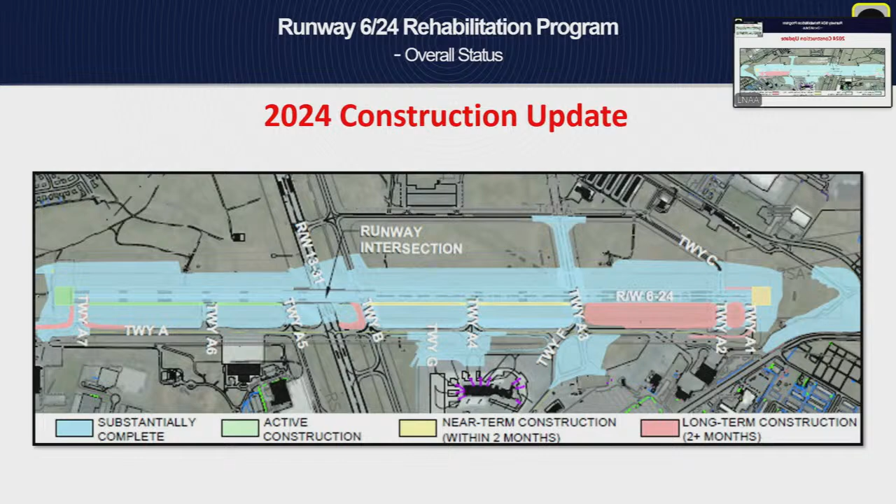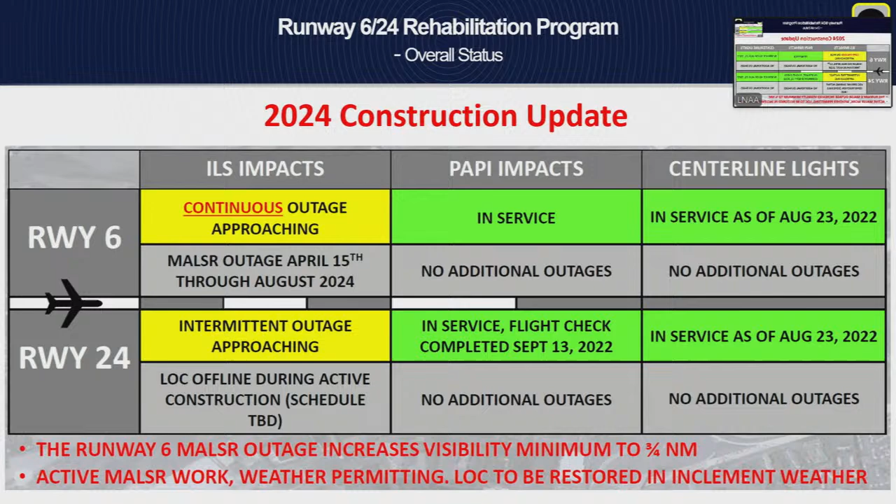As we like to show is just some of the outages coordinating with FAA. FAA is still working on the MALSR project, which is the instrument lighting system replacement. So we haven't heard any issues with the carriers, but we've been coordinating with them in terms of impacts. And FAA has actually been working really well within our construction time frame at night, getting the work done when the runway is closed.

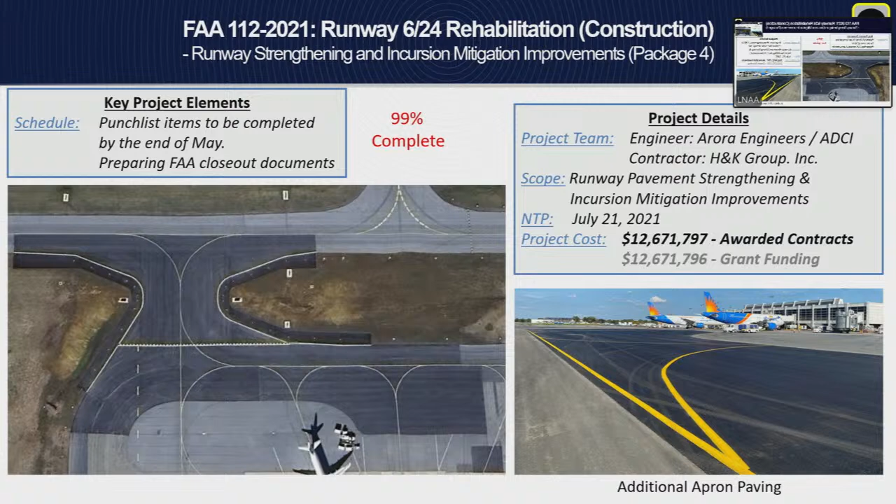Package 4, this one, as we talked about, is really just working through the punch list. Probably in the next couple weeks, we'll get the final numbers and quantities and then working on the FAA closeout. And again, the reason we show that is the final 10% of the grant we can't request until we actually submit the full closeout, when you know the final project number. So we kind of hold that because it'll probably be about $700,000 to $900,000 that we have to request at the end. So again, that's a good chunk of money we want to keep an eye on.

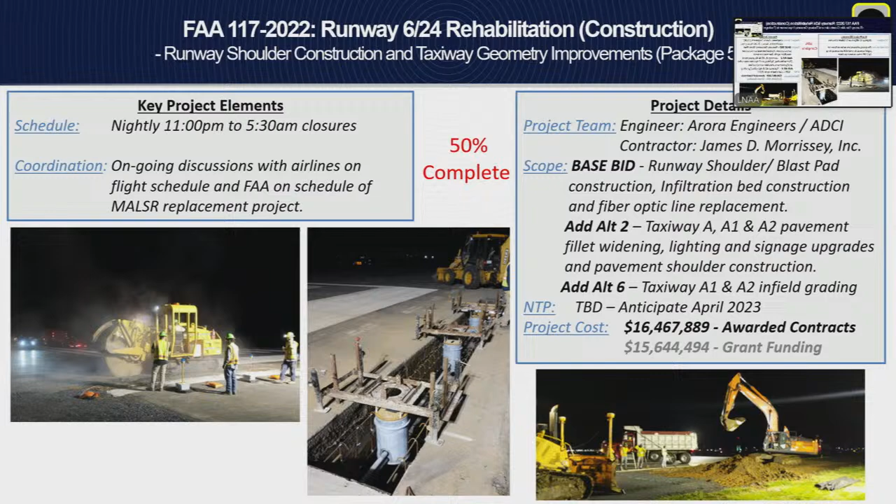Package 5 is really the work that we just talked about in terms of the shoulder construction. Again, nightly closures, 11 p.m. to 5:30 a.m., coordinating with the carriers. As you can see, again, putting in the approach end lighting or the threshold lighting. So all the work they got to do. And again, every night, basically building in the base of the shoulder, moving on, and then they'll come back and pave that.

So I added this project that we've been kind of working on behind the scenes, but just wanted to get the committee up to speed. Included in our CIP, the taxiway alpha rehabilitation. So taxiway alpha is the parallel taxiway to runway 6-24. So currently looking at the design documents, you can kind of see the green is really just a typical pavement rehabilitation, mill down, build back up.

The blue in the photo is actually areas that we need to completely reconstruct just because of the base that was in there before, the condition of the areas, and similar to what we did with the runway 6-24 project, because of the heavier cargo aircraft, we actually have to beef up the pavement section as well.

So currently working through the design, coordinating with operations on some of the impacts of how we're going to do the project, similar to the runway 6-24 project. Also coordinating with the FAA on funding. As of right now, kind of that blue rectangle is what we're looking at as the phase 1 construction based on FAA funding availability.

So as we work through that in the next couple of months to hopefully put a bid out in late June, maybe July timeframe for a grant this fall, that's kind of the section we're looking at. So more to come. I just wanted to make the committee aware as we're working through that FAA project.

You can kind of see here in some areas of Alpha, that's a pen sticking out in the back. So it's not something you really want on a taxiway when you got cargo aircraft going down the pavement. And the reason we're actually doing this first is this section right here in front of Hangar 10 is probably one of the worst sections of the taxiway. So trying to hit that first.

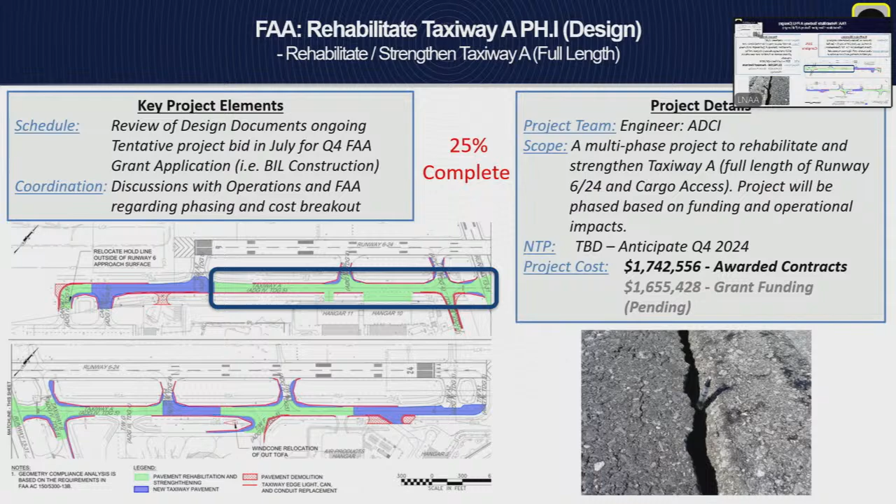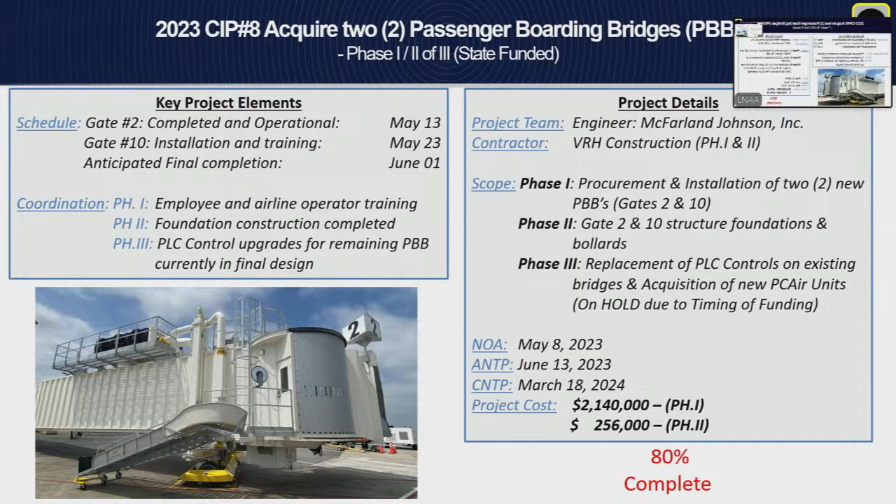So no, good question. Boarding bridge project, been pretty busy this past month, so Gate 2, which was, as a reminder, former Gate 3, I think we showed was installed last month, but it went fully operational May 13th of this month. Gate 10, currently removed the old one, put the new one in, currently working on commissioning it, and probably the end of next week, that'll be up and running as well.

So again, just some photos. Top left is Gate 2, former Gate 3. You can see you got the updated markings of aircraft that are on there. And then bottom left is the old, pretty old looking too, Bridge 10, and then the new one that they were putting in. And they did that swap basically in a day and then just continue to work through it.

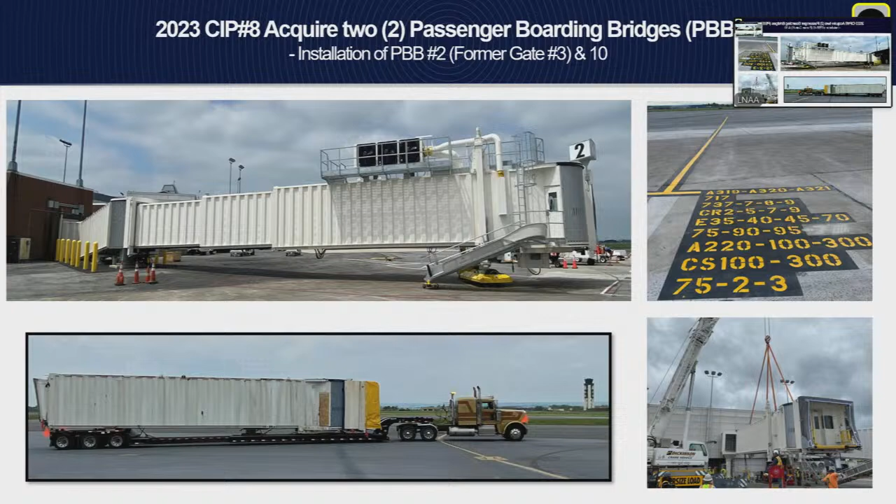Parking garage project, really working, as we talked about before, with the engineering team. So we've had 2 meetings at this point with AECOM, have another one scheduled in a couple weeks. Really working through, just as a reminder, updating the site selection matrix. And given what we know from when we first started the project and with parking demand and trends, really what makes sense. And we're evaluating again, really between the current employee lot and the short-term parking lot and seeing the pros and cons of those before we continue to move forward with the design.

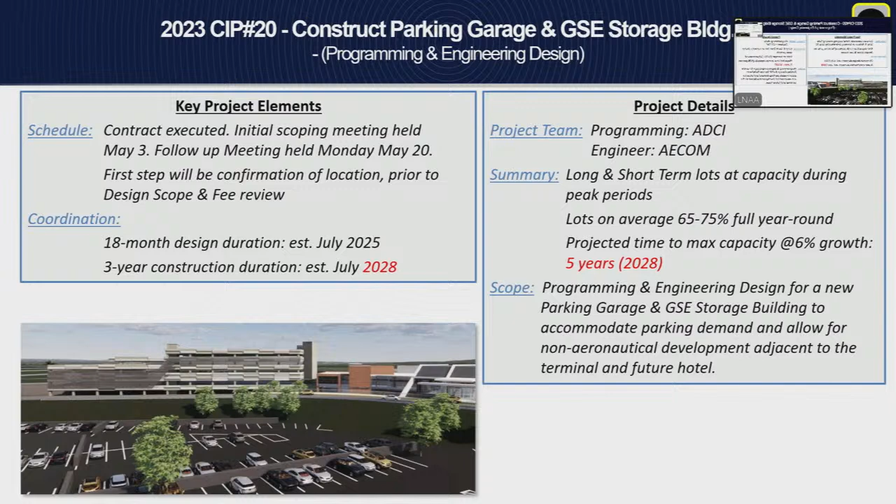But again, you were talking about earlier, financing and projects, but still looking at the timing of the need for parking, running out of capacity in 2028, which is why we're looking at doing this now. So more to come, but we've been having a lot of conversations with the group. And I think it's been a good team selection that we did with AECOM, working with ADCI, our program manager, and getting everyone's thoughts together and the roles and responsibilities has been a good transition. So we're excited to keep that moving.

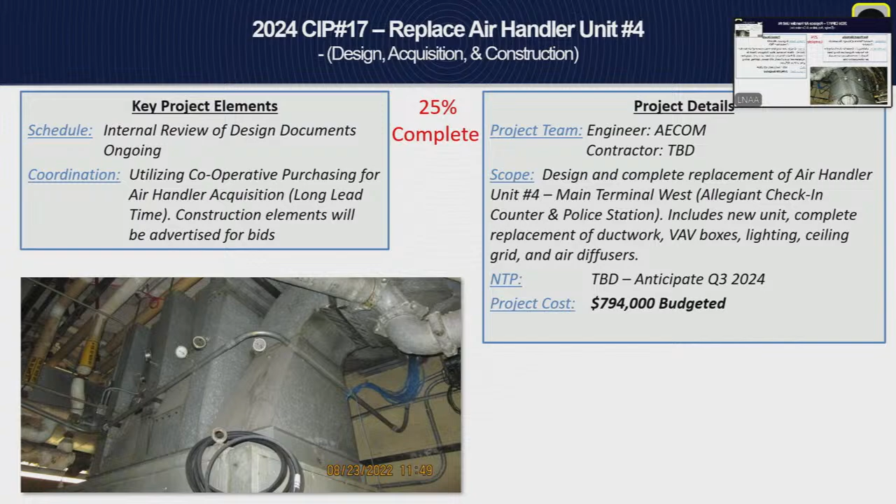Not much changed on this, working through the documents for the Air Handler Unit 4 replacement, as we talked about before. We're looking to procure the actual air handler through cooperative purchasing because it's a long lead item, and then work to get the other trades advertised for bids. So we're still working through that process as well.

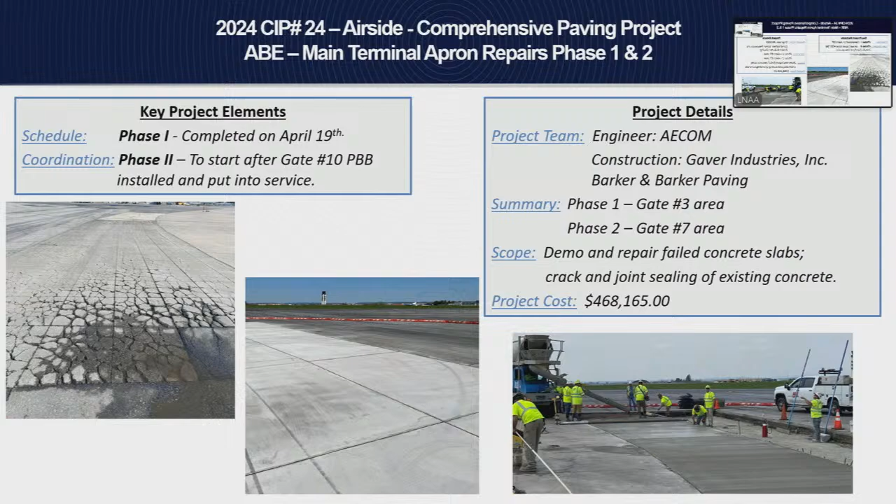Queen City: again, we mentioned this before, the 2 FAA grants for the lighting replacement of runway 15-33. Really just working through coordinating the timing of when the new vault will arrive, and then working backwards from there in terms of construction. So probably late summer, early fall is when we'll start getting that work underway. But as a reminder, it's replacing all of the lighting and conduit along the runway, adding this section of lighting that never existed, and then putting in the new electrical vault right there behind the hangar. So just trying to coordinate it so they're not coming in now, doing the lighting work, and then waiting until the vault basically arrives.

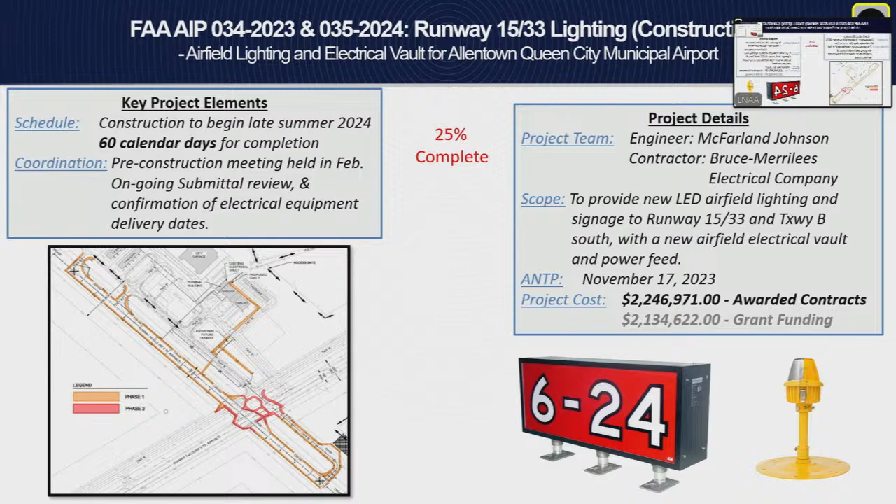Any questions for Ryan? All right. Seeing none, you did a great job. Thank you. Appreciate it. Any new business for the business committee? No need for executive session that I know about. Am I right, Tom? Nothing. All right. I'll take a motion to adjourn. So moved. Our newest member will second it. Perfect. We're adjourned. Newest member for one meeting. Well done, Ricky. Thanks.